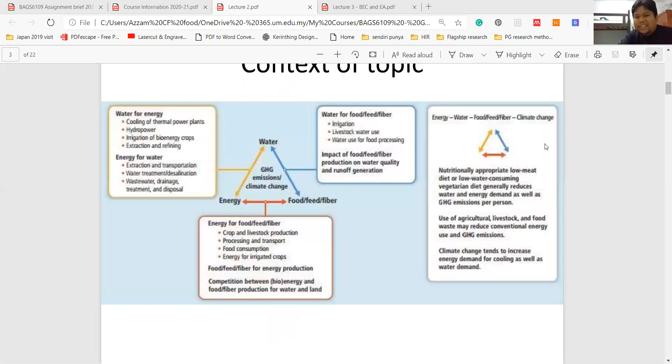Because of the loss of arable land and things such as that, and at the same time because of the boom in population, you have to look into the supply and demand of energy and water as well. Once you get a boom in population, there will be a boom in the energy demand as well. So definitely you have to build more power plants, definitely have to import more coal from somewhere else, from Australia let's say, to burn and generate electricity. Otherwise, you have to go into solar panels.

It has been constructed in Malaysia, which is a good thing. Go back 10 years ago, you don't see such a thing, but now you can see some solar panels going on. Even TNB, perhaps the biggest polluter in Malaysia, we rely a lot on them.

They hold the monopoly on our energy generation, and they are the biggest polluter because they have a number of power plants under their control. There are also some independent power producers in Malaysia as well who are polluting the earth, but they're essential. We need them, so we can't simply just get rid of them very easily.

So slowly you're going to have to change them to other means, other renewable sources of energy. For instance, TNB also has got a lot of hydroelectric dams, so they're moving towards that. About 20% of our energy comes from hydroelectric nowadays.

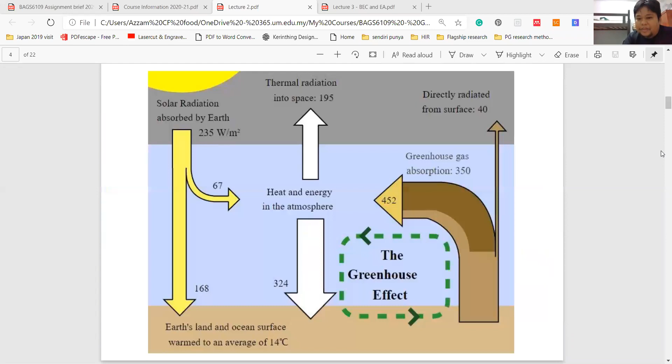At the same time, because of the boom in population, the boom in consumption of food and everything else, the boom in the use of cars emitting carbon dioxide, carbon monoxide and all the other noxious gases into the air, it's exacerbating the greenhouse effect. It's turning the atmosphere into a shield rather than something permeable, shielding all the heat inside the earth. That heat is not able to go out and be released into the atmosphere, so now the earth is warming up.

At the same time, the amount of carbon dioxide absorption by the seas—our sea is very important, it's been absorbing a lot of carbon dioxide over millions of years—but scientists have found out that our seas right now are not able to absorb a lot more carbon dioxide anymore. It's coming up to a point where there's far too much carbon dioxide—it's saturated, so to speak. The eutrophication is at a certain limit where the seas cannot absorb any more CO2.

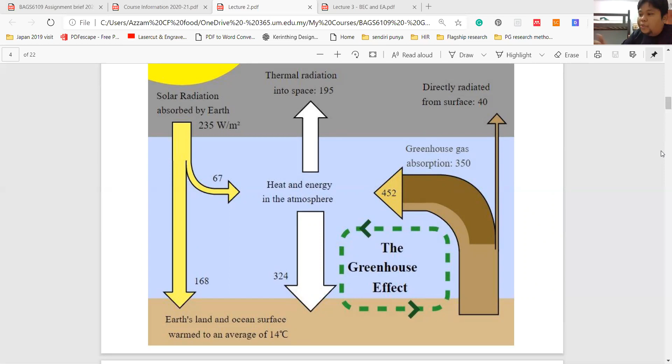I mentioned to you about opening up Sarawak for cultivation, but you don't have to go to Sarawak. For people here on Peninsula, you go just across the straits to Sumatra. Year in, year out, every single year we get this haze, isn't it? This haze is caused by people opening up land, slash and burning away all the vegetation. Why? They wanted to open it up for farming. Farming of what? Coconut oil, palm oil, and a few other things as well, farming fruits and everything else.

Because of that, you've got millions of hectares of land in Sumatra which has been opened up, including peat land, the ones with really dark soil, which exposes the land to the atmosphere and releases all the carbon that has been trapped inside the land. All that CO2 that Indonesia has been emitting last year, or the year before, for the last 20 years or so, isn't just coming from the forest fires. It's also coming from the land which has been cultivated, as they start digging out all the land, releasing all that CO2.

And to make matters even worse, those ice countries, North Canada, Greenland, Iceland, and a few other countries as well, are losing their ice caps at phenomenal levels. The ice is melting like mad. And this ice, when it became ice a long time ago, absorbed a lot of CO2. Now, once it starts to melt, all that CO2 comes out, polluting the earth. It's invisible.

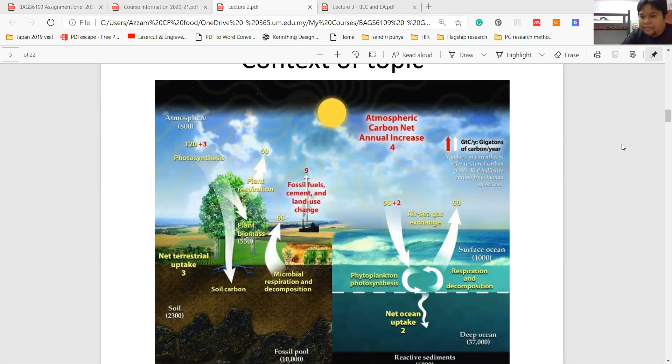But they've been doing a lot of really good work over the past 10, 15 years or so. They've been shutting down a lot of coal power plants, and opening up a lot of solar plants and nuclear plants, even though that's not that good. But nevertheless, they're moving towards renewable resources, sources which are not polluting the earth so much. The amount of solar farms they've been building is almost 4 or 5 times the amount of global solar farming development every year. They've been doing it themselves.

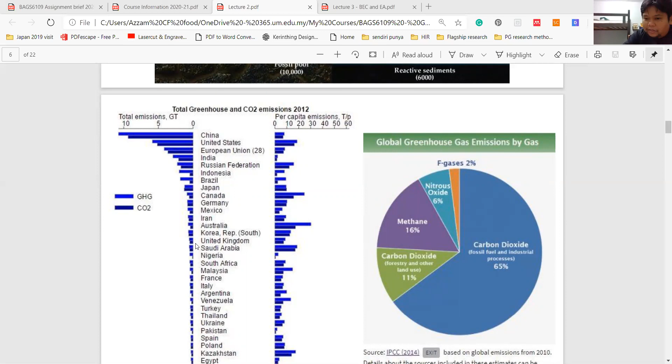It's a bit skewed, but the actual thing is here. The problem is, once you add up everything, it is still a lot. So everybody on this earth will have to work together to mitigate climate change. We have to have carbon trading, and a lot of other things like international laws dealing with carbon emission. Carbon dioxide is the biggest.

It comes from everything - even us breathing out carbon dioxide all the time. So the more population we have, the more carbon dioxide we'll be breathing out. So technically, we are contributing to the demise of the earth, anyway.

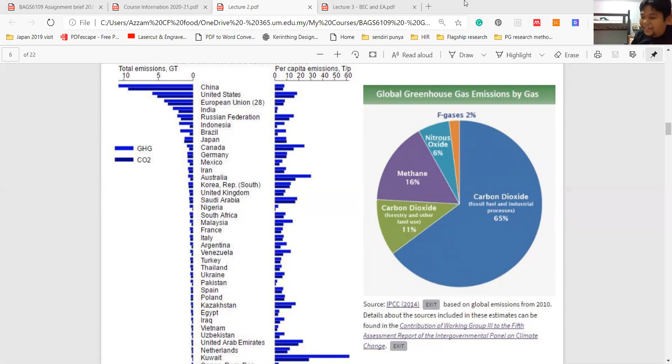The earth will definitely stay - the earth has been around for, I think, 4.5 billion years or so. Us humans, we've only been in existence on Earth for about - I think the oldest fossils they found are about 100,000 years. So we are a tiny speck in the history of the Earth, technically. One day the humans will die out. I don't know, it could happen, but that's what it is. It's a bit grim for us.

So root causes - population growth. This is what you get in India. You go to, let's say, Bangladesh - let's say our friend Opita. I don't know whether where you live, but if you live in Dhaka, Dhaka is perhaps one of the most heavily populated areas.

Yeah, I don't live in Dhaka. I'm from Chittagong. Yeah. You know, Dhaka is one of the biggest population centers on earth technically.

Yes, one of those really heavily populated, and the pollution level is skyrocketing as well. The traffic jam is crazy - technically you're not able to go much anywhere. I've got a few friends in Dhaka and they've been complaining to me about traffic jams over there, regularly. Yes, that's pretty bad. But Chittagong really is far better than Dhaka.

Of course. But having said that, there's a lot of drastic things that have to be done to really curb this. But in the case of a lot of these population centers, even if you go to Japan, to Tokyo, Yokohama, that is technically the biggest urban center on earth - they've got about 40 million people living in that area alone.

But having said that, you compare that to, let's say, Dhaka, or Lagos in Nigeria, or Jakarta even - totally different kind of environment. But having said that, technology has to come into play, economic equitability has to come in. People have to be able to get enough food on their plates, enough salary and everything else.

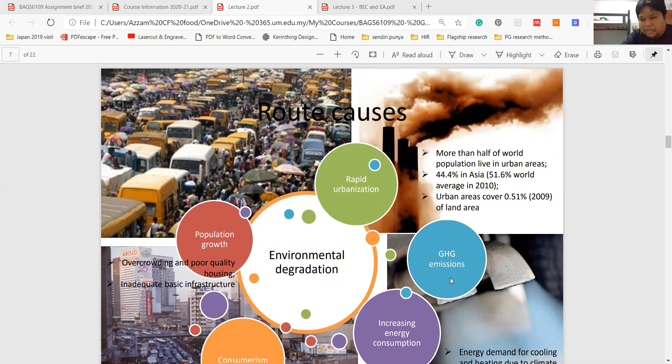So the sustainable development term comes into play. But nevertheless, it's hard work on everybody, definitely. We get rapid urbanization, a lot of greenhouse gases being emitted left, right, and center, and an increase in energy consumption. Once you get a lot of people, you definitely need a lot more electricity. The last thing you need is a power outage, right?

Nowadays we sort of expect that electricity will be provided to us every single minute of the day, every single day of the year. If you get a power outage for about 10 minutes, we'll be crying foul. That's what it is in Malaysia right now, and I'm pretty sure everywhere else in the world as well.

But if you go to places such as the West Bank in Gaza, in Palestine, they only get electricity for about 2 days a week. That is the maximum they can get. So what happens the rest of the week? They don't have electricity, they're living on nothing. But that one is a totally different story.

They still have got some urbanization going on. Gaza in itself is one whole city, one big city, even though it looks small, it is technically a big city - got a million people there. It's about 2 million people living in a small stretch of land, being persecuted by the Israelis. They've got closed borders and whatnot, but at the same time they don't have enough electricity, they don't have enough resources. They don't even have enough water, for God's sake.

So tough, right? At least over here, we can still import stuff, we can still produce stuff for us to consume. And then at the same time, when I talk about consume, we have this consumerism going on.

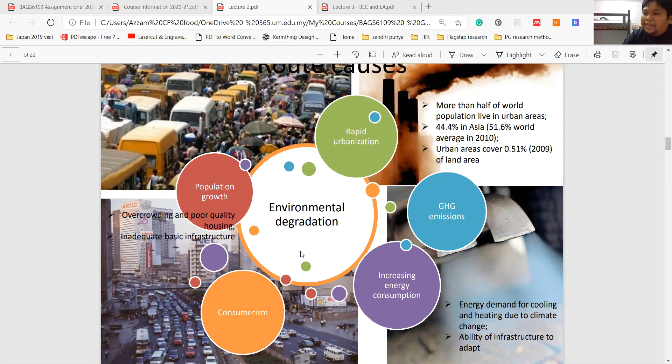But it is something that we can't really run from. It's happening. We have to deal with it.

Huge city, huge city. Our Kuala Lumpur, our Klang Valley is big enough for us - we are reaching 9 million people already, so very soon we're going into double figures. We're joining all the big cities around Southeast Asia - you go to Jakarta, you go to Manila, you go to Bangkok. These are the three biggest urban centers in Southeast Asia - they are already breaching 15 million.

It has created a lot more environmental stresses compared to us. Jakarta, for instance, is sinking, just too much amount of weight. There's a lot of buildings, a lot of people, a lot of everything. They've been taking a lot of water from the ground as well, because they don't have enough water from the rivers. Because they're taking too much water from the ground, and the ground is soft, the soil is soft, it's not stones. Here in Kuala Lumpur, we are sitting on limestone, pretty much, our city. Jakarta is not sitting on any limestone at all, it's flat. It's technically alluvial land, good enough for paddy farming.

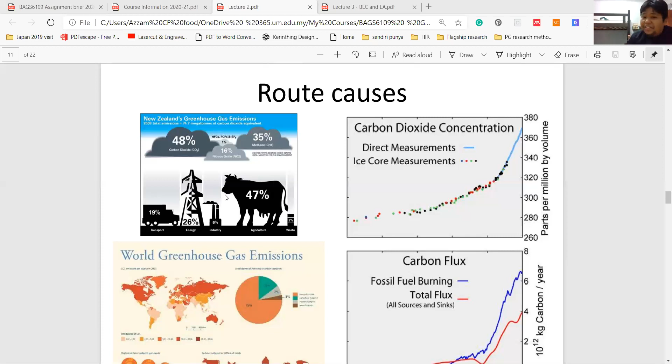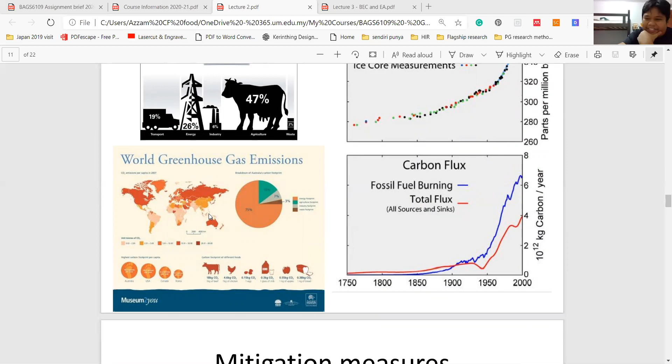This is such a small amount, but if you look at the really dark colors, these are the countries which are really producing too much carbon emission. Us, we are at orange, getting there, becoming red very soon, so we have to look out for that. Just look at Saudi Arabia and all the other Arabian countries - they're red, because they consume a lot of air conditioning.

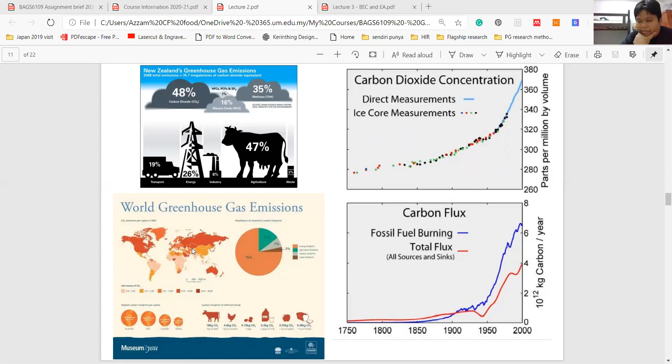They use a lot of air conditioning, consuming electricity for that. They consume a lot of water from the ground and from desalinization. There's a lot of energy being used to clean their water, to process sea water into drinking water. So their carbon emission is really high. They also use a lot of cars, and public transportation is really poor. So yeah, it's grim over there.

So, mitigation measures - what can you do to limit all this? You've got a few things we can do. For instance, us architects, we have to help out. We have to design green buildings, green architecture. I mentioned green buildings many times last week. Here are some examples.

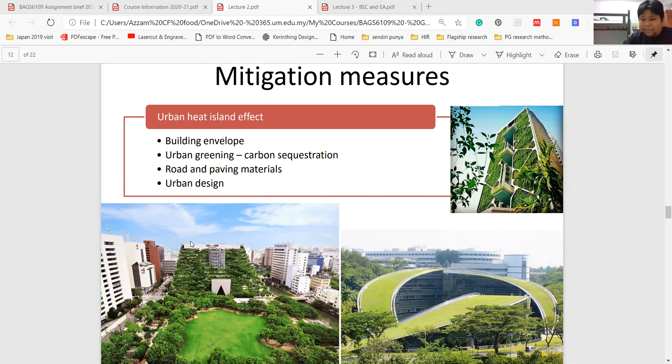So for instance, this building here is the Nanyang Technological University, I think a business school. And this one here is in Fukuoka, Japan - it's a city hall, right? But they built an urban farm plus a parkland that goes up into the building, extending the ground parkland onto the building, which makes it even nicer.

They've been hampered by not having enough space for parks, so at the end of the day the architects came up with the idea of putting a park on top of the roof. Whereas in Singapore, they also don't have a lot of space for greenery, so they have this lawn that goes up onto the roof.

Lawns are actually okay when it comes to doing green roofs. The blades of grass are able to absorb a certain amount of carbon. The carbon sequestration capability of grass is quite high.

But it's not as good as, let's say, certain palm trees. Palm trees have got a lot of leaves - the longer, the bigger, the wider the leaves are, the more carbon they can sequestrate or absorb. Grass is very small, but the blades of grass, at that particular scale, are quite wide, quite long and thin, and everything is exposed to the environment as well. So there's a lot of exposure, therefore they're able to absorb a lot of carbon.

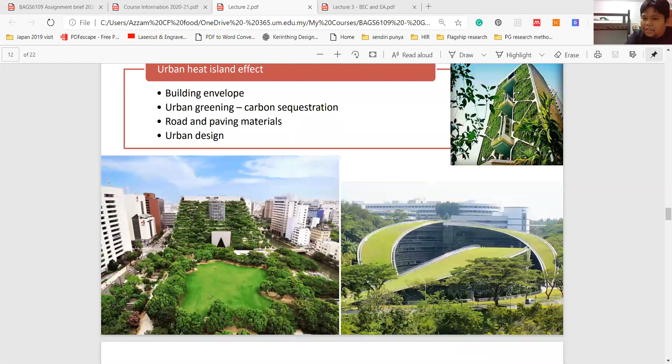So we as architects can create all these opportunities - not just to restore the biodiversity of the ecology, but to add to it, to add value to it. Just now we saw examples adding value to the ecology. This one here also adds value, but adds another dimension to it - awareness, education, and getting people to love the environment.

This is such a good thing - even though people would argue about the aesthetics and everything else, to me the benefit of getting people to be aware of the environment, the education benefit, is even more important than the aesthetics. So at least now people in Singapore, or the visitors that go to this place, hopefully will love the environment more.

And then you get something similar here in Singapore as well - this is the Park Royal Hotel.

They've taken the urban greenery and vertical greenery to another level. Yes, you have to pay like $700 a night at this particular hotel, which is extremely expensive. But having said that, they have successfully introduced this into a building, so you don't look at your building as just another piece of architecture. You can technically turn it into an opportunity to add to the ecology.

Adding the greenery not just for the benefit of the animals or insects, but also for our own benefit. The people who go and enjoy the hotel rooms will probably get a nice view of the plants and trees. It's fresher, and you can hear the water instead of the traffic down underneath.

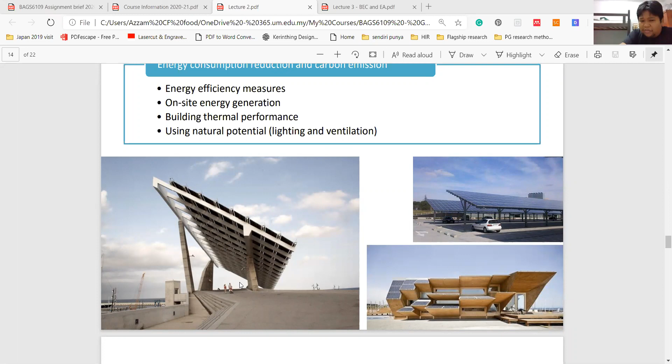And then again in Spain, they do something quite radical - they put solar panels at a graveyard. When you look at this the first time, perhaps it looks like an apartment, isn't it? It's not. You can just about see crosses, all the flowers and whatnot. These are graves.

If you can imagine the Nirvana Memorial Park that we have here in Kuala Lumpur, totally covered by solar panels - perhaps it doesn't feel so much like this one here, because the Nirvana Memorial building is a building, right? You don't see any graves in it. This one here is totally exposed.

Traditionally, yes, it's been here for many generations. And then suddenly the city council - I forgot the name of this town - they were the first ones in Spain that tried to do this.

The city council analyzed the amount of electricity the city was using, and then they found out they were not making enough money. They were using too much electricity and not making enough money to pay the bills. So at the end of the day, they came up with a radical idea of mounting solar panels on top of the big graves they have around the town.

At first, the population, the people in the town, got really angry. To them it's sacrilege - how would you go and install all these solar panels on top of our grandfather's graves or something like that? So they were up in arms against the idea.

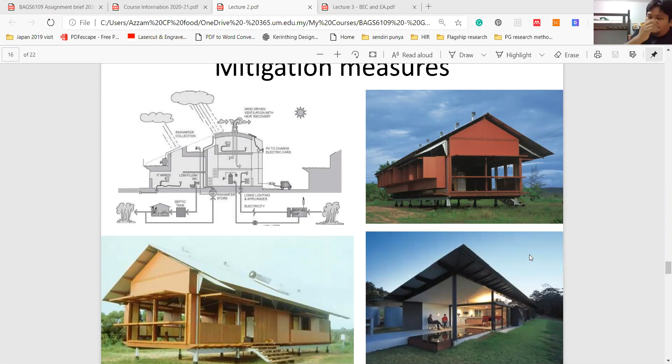Other mitigation measures: look into water efficiency, of course, harvesting of rainwater, and perhaps go and process the gray and black water as well. So for water efficiency, you look into replacing your taps, replacing your shower heads.

Repair any leaks, old pipes made of metal might have corroded away. You might want to replace them with really good PVC plastic ones. PVC plastic is not good for the environment, but technically it's perhaps the next best material if you compare that to, let's say, lead or metal pipes or ceramic pipes. In the old days you would use some ceramic pipes for your sewerage plumbing.

Still the best benchmark to use ceramic pipes because it's nice and clean and really slippery, but at the same time it's made out of a non-renewable resource, clay. If you use plastic, it comes from the byproduct of the processing of oil. As long as you recycle the plastic at the end of the day, it should be okay. So hard plastic like PVC should be recyclable. Soft plastics that you use to carry your food, most of it is non-recyclable, you have to stop using those. But for plastic pipes, really hard PVC pipes, that's the latest product you probably use for piping nice clean water, at the same time piping your sewerage as well, in comparison to metal and ceramic pipes, which you're gonna have to change.

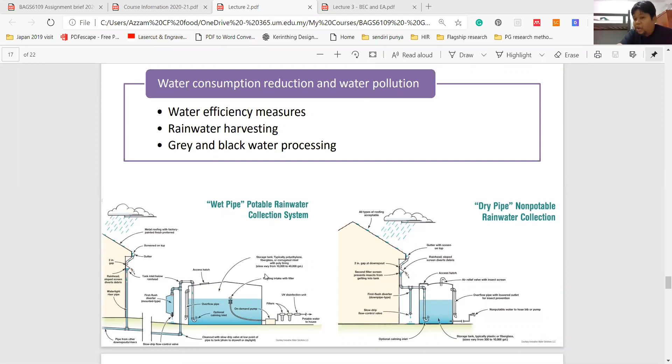Otherwise, just non-potable ones. And then you can do other things as well, like I mentioned, gray and black water processing. I showed you last week the CH2 building, Council House Building 2 in Melbourne. That building processes the gray and black water for the buildings around it. Technically, you can do the same if you want, but you're gonna have to invest some money in some machines and some plants in order to really filter the gray and black water, to turn it into a non-potable source of water that you can release straight into the drains.

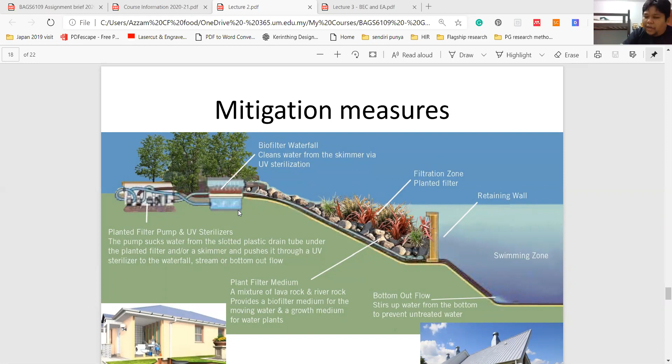So you can have biofilters. Biofilters are plants and trees that can be used in order to filter the water. All that gray water from your house, from your building, can be let through this system, filtered by organic, natural means, and then the water can go straight into a pond or a lake. This is evident in developments such as the BedZED development I showed you last week, and increasingly in many other developments, they're using biofilters to filter water, especially filtering the storm water. Rather than draining out all the storm water, they will simply collect that water, filter it, and then let it go into a pond or a lake.

This rainwater harvesting system can also be made to look good, such as this one in Australia. It ties back well with the aesthetics of the building. You can even put it underground. The technology is here, you simply need to buy it and use it.

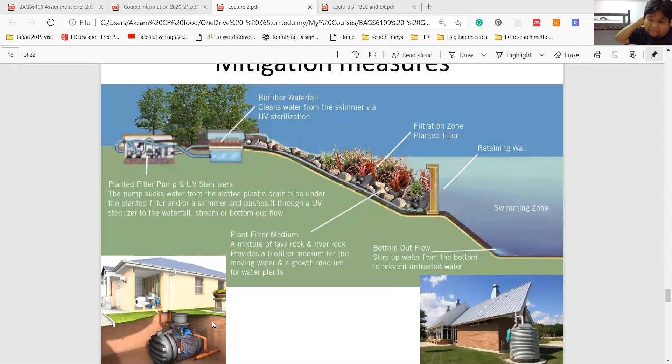You can also go into another part of green building, looking into construction and structure. You can do adaptive reuse of existing buildings, so you don't just demolish old buildings but reuse them for another purpose. You can also recycle building materials, reducing the use of new or virgin materials by using old ones.

You can also go into IBS, such as these IBS panels, IBS floors, IBS walls, and IBS blocks as well. No reinforced columns here, no reinforced concrete beams, just blocks.

A few years ago, I designed and built an IBS home on campus. If you go to the engineering faculty, there's one small, low-cost looking building situated beside the new tower. It's all made of blocks. Even the beams are blocks, the columns are blocks, and they're all IBS blocks. There's no reinforced concrete whatsoever in the columns and beams, except for the floor, of course. It was built within a couple of weeks, really quick.

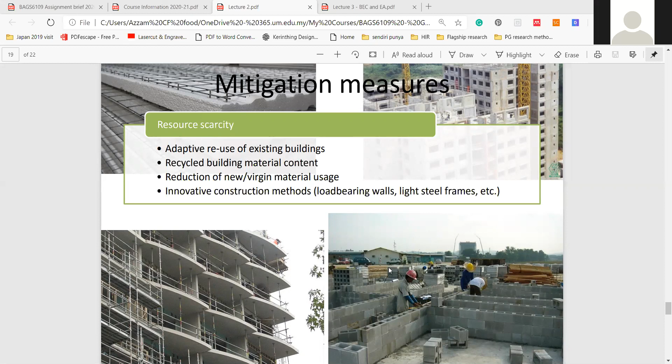There are also other panels as well, like this one here, somewhere overseas. It's polystyrene actually. It's not really good for fire retarding, but nevertheless it's good for keeping out the heat and keeping coolness inside the house. Just imagine your cool box, where you put all your food inside. Same thing, but it's not good for fire.

For our faculty building, we have precast concrete beams and columns. So this is an example here. All these are being transported to the site.

So you can have something like this happening in your building. Normally you would design reinforced concrete beams and columns, but you can change your mindset and use precast ones as well, and nowadays you can make them look good too. You see the paneling here, you simply manufacture the panels, store them, move them to a certain location, and fit them together. This kind of construction is happening in Malaysia already, quite ubiquitous.

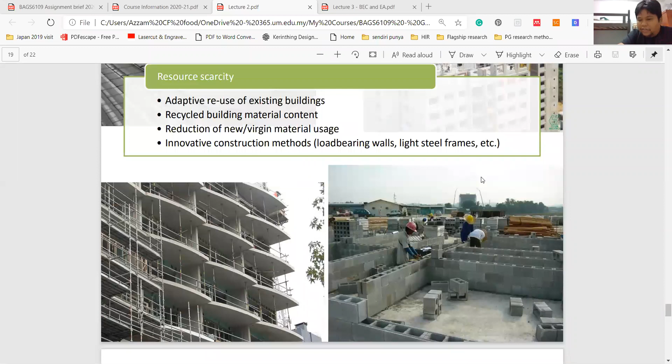A lot of buildings, a lot of developments nowadays are using this, even this kind of development. There are many apartments in Putrajaya and Kuala Lumpur being built using this nowadays.

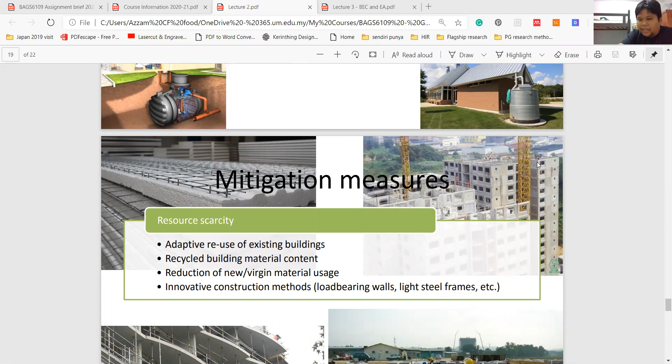This is because of companies such as Gamuda, which has got one of the largest, I think the largest, IBS manufacturing plant in Malaysia. They're manufacturing not just for their own consumption, but also for others to build.

There are other developers such as Country Garden, the developer of Iskandar Malaysia, who built 3 factories just to cater for their own consumption, manufacturing IBS components of many kinds to be used in their own buildings in Iskandar, Malaysia. They've even got international awards for it. Hopefully very soon they should be able to manufacture for other developers to use as well.

There are also smaller developers such as Sri Pajam, in Negeri Sembilan, who've been developing a lot of housing estates. If you go to their housing estates, at one corner of the site there should be a manufacturing center for IBS panels. They manufacture on site, and by using gantries and cranes and whatnot, simply locate everything into place, with only a few people working on site to put all these panels in place. It's a very efficient way of constructing, reduces a lot of wastage, and is cheaper.

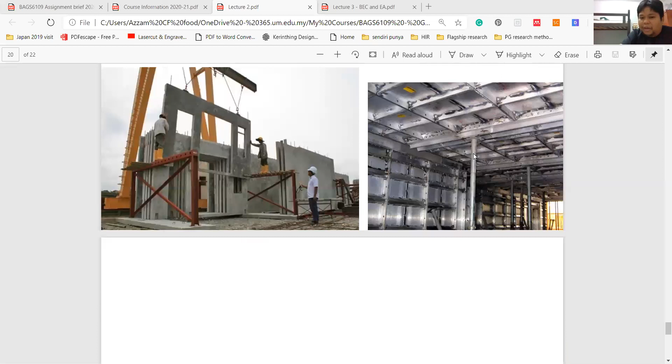But nevertheless, this kind of development is happening in Malaysia, and it's also happening in our own faculty, which was built using this particular system. Besides that, the future will probably be to manufacture the whole house or small building at the factory and just bring everything and assemble on site. In terms of technology and capability, Malaysia has that already.

For your information, we do have a number of plants in Johor manufacturing a lot of these prefabricated components, toilets, parts of homes and whatnot, all in the factory, and everything being exported to Singapore. Why? Because we don't have this kind of demand inside Malaysia just yet. We don't have a lot of it.

The only project that I know of that has used prefabricated toilets is perhaps the Holiday Inn Express in Kuala Lumpur. The building they are occupying right now is an old office block, about a 40-story office block, so they converted it into a hotel. Half of the building converted into a hotel, another half I think is still an office. So in order to turn an office without all the plumbing and whatnot, they use these prefabricated toilets, fitted everything into the floors, and then fitted the rest of the floors with the rooms. So now they have a really nice hotel, but that is the only one that I know of.

But everywhere else you don't get this. Very rarely do you get prefabricated toilets or components of houses in Malaysia. So all the manufacturing companies in Johor are all producing for Singapore because the demand is pretty much there. But if you go to other places like Denmark or parts of China, they've been building timber buildings, like 8-story timber apartments using prefabricated timber.

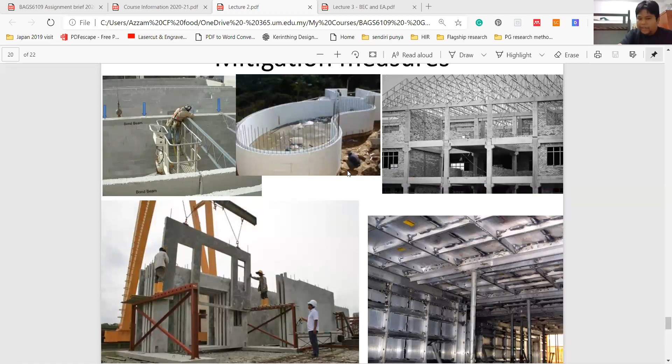It is crazy when you talk about it, but nevertheless it has happened. So the technology is moving forward, which is fantastic, and this is the future. So no wastage whatsoever, everything is nicely measured. The carbon emission pretty much happens in the factory, plus the transportation to the site. But nevertheless, a lot of highly skilled labor, a lot of technology being used, a lot more value and money in it as well, one level up in comparison to the conventional construction technique that we have been using all this while.